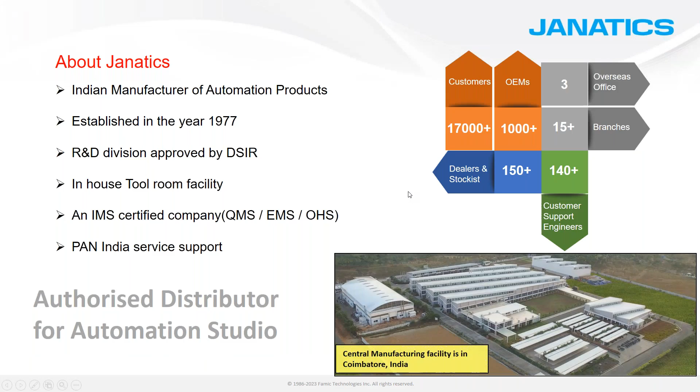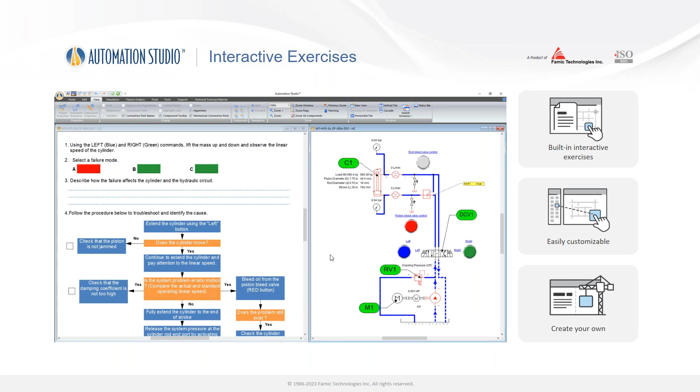Automation Studio helps you create a virtual twin of the hardware within the software, where students or teachers can change different properties and have a better understanding of the interaction between different components in the circuit. Later, they can use this experience to work on actual hardware, which could be more safe and reliable.

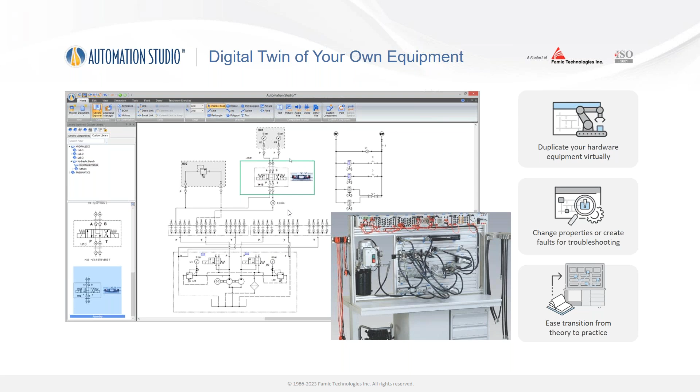We have illustrated libraries in the software. Illustrated libraries give more visual appearance of the component, how it looks in real life, for better understanding for students, where they can compare the ISO symbols and the actual 3D representation of the component.

The benefit here is that if you go for hardware alone, there are often limitations where only a limited number of students can be trained on particular hardware. But if you have hardware plus Automation Studio, students can have access to different circuits, better understand the interactions of the components and the impact of properties, and then later use it on the hardware.

It also enables students with circuit design software skills. Students gain idea about ISO symbols and it helps them develop blueprint reading skills.

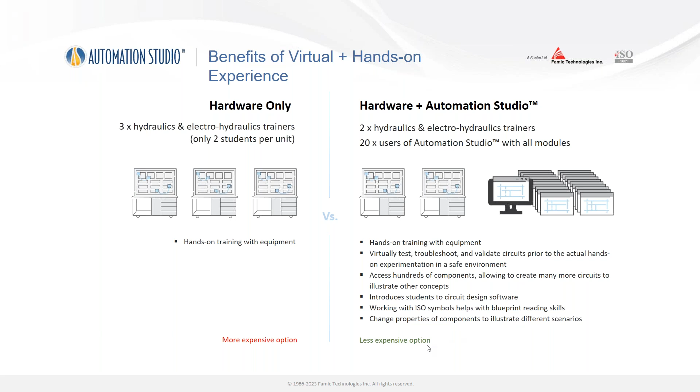In addition to these features, Automation Studio also offers a manufacturer's catalog. What are manufacturer's catalogs? They consist of pre-configured, ready-to-simulate components with exact manufacturer-specific data. All you need to do is configure the product from the catalog and drag and drop it into your schematic and use it in the system integration.

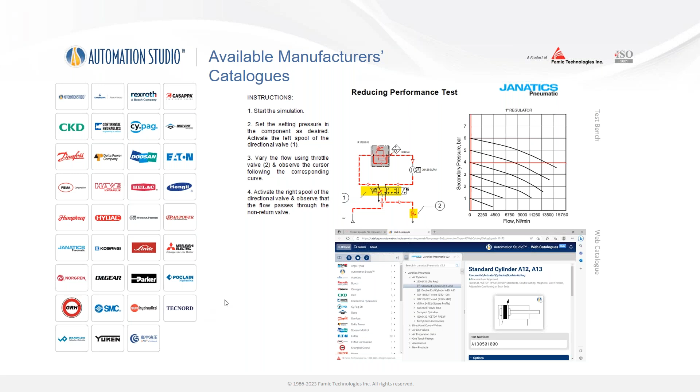We have manufacturer catalogs for different manufacturers like Emerson, Bosch Rexroth, Danfoss, Doosan, Eaton, Hengli, Janatics, Parker, Poclain, Sun Hydraulics, Yuken, and so on. These are a partial list of our industrial clients.

So this was the brief introduction about our company and what we do.

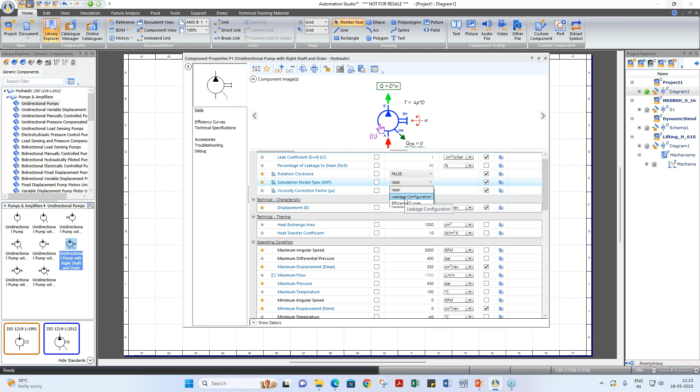But if you want a better real life scenario, you can go for a leakage configuration wherein you can introduce some losses or efficiency curves. Let me show you how it differs. When you select leakage configuration, you can see the image has changed, indicating the behavior.

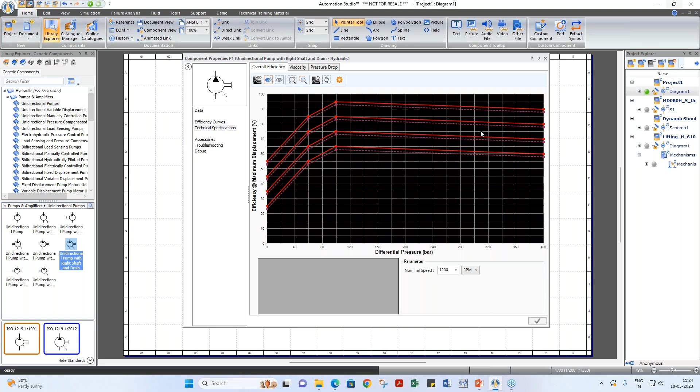Once this is activated from the simulation model type, you are able to enter the technical specification curves. In this technical specification curves, you can define the overall efficiency curve, which will in turn impact the losses. You can define the viscosity dependency curves and the pressure drop curve, which will indicate the losses with respect to the pressure.

Or if you have efficiency curves, which in most cases are provided by the manufacturer, you can see the image changed, and then in the efficiency curves you are able to enter the overall efficiency curve, volumetric efficiency curve, overall efficiency curve, and viscosity dependency.

This is a generic curve right now, but if you want to edit it and you have the data with you, just click on the curve and you can copy paste it over here. So if you have data in Excel, you can directly copy paste it over here. So you can have different configurations or simulation model types for the pumps.

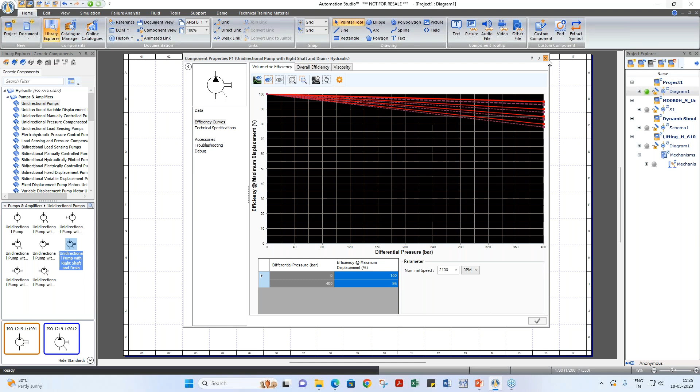Let me show you the different behavior through an already created file. So here on my screen, you are looking at different models. Let me just start the simulation.

So here we have a pump without shaft. When you click on it, you can define the displacement and the rated speed directly, which will influence the output flow. So here, as it is an idle pump, you can just see all the flow is going - 80 into 1200, which corresponds to 96 lpm - going back to the tank, with no losses.

Similarly, if you have a shaft, but again an idle pump, you can see again almost 96 lpm is going back to the tank. Here we have an idle scenario. The pump displacement is 100 cc.

The speed is 2000, so the output flow should be around 200 lpm, which is what I can see on the screen. All the flow is going back to the tank, so the output flow is going back to the tank. As it is idle mode, there are no losses. Same goes with the pump with drain, as it is in idle mode.

But suppose, as we discussed before about leakage configuration, if I configure the pump for leakage configuration, there are curves inside it which will influence the losses. So here you can see the output flow should again be near 200 lpm, but you can see there is a certain amount of losses, almost 7 lpm for 140 bar. So there is 7 lpm losses, which could be the internal leakages.

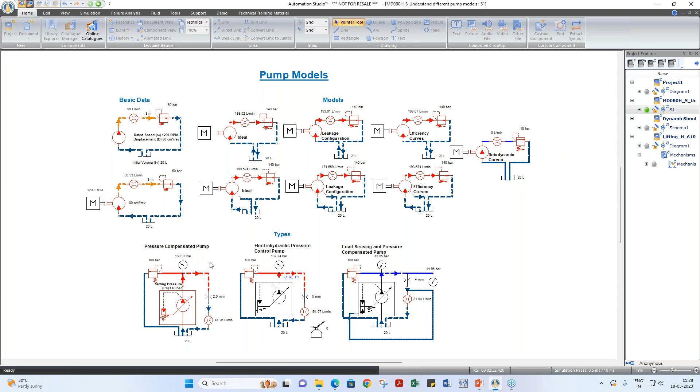In addition to this, we have a pressure compensated pump. Here, pressure compensated behavior means it should maintain constant pressure at the output of the pump, irrespective of the load. So even if I change it, you can see it is trying to maintain 140 bar.

We have an electro-hydraulic pressure control pump, so here you have an additional command. This pedal is linked to the solenoid of the electro-hydraulic pump, which can control the pressure at the output. So you can see when I'm changing the input, this control pressure is changing as per the input I'm giving through the pedal, decreasing the compensated pressure.

Similarly, we have a load sensing compensated pump. As we know, load sensing tries to maintain a constant pressure drop across the orifice. In addition to the displacement rated pressure and setting pressure, it has an additional property called differential pressure setting. Based on what setting I define, it will try to maintain that much pressure drop. Right now it is maintaining around 12 bar of pressure drop, and even if I change this orifice, it will still try to maintain this 12 bar pressure drop.

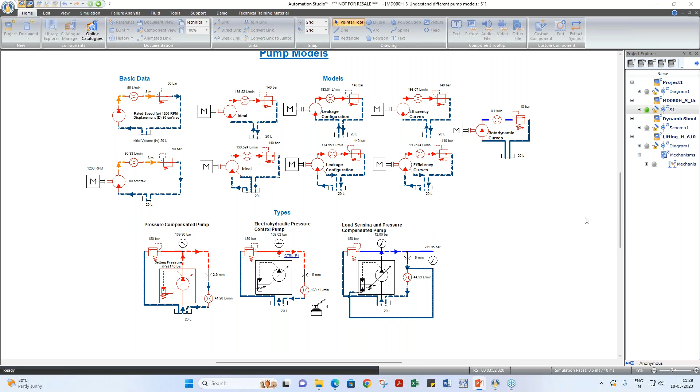So there are different models that we have in Automation Studio, and you can use them as per the requirement in your system. This was related to the pump. Now let us look into the proportional valves or direction control valves.

Let me create a very basic circuit to demonstrate that. I'll take some components from the library: a unidirectional pump, a reservoir, a 4x3 direction control valve, a relief valve, and maybe an actuator. For the actuator, I'm taking a double acting cylinder. So, basic components, I can zoom all the components.

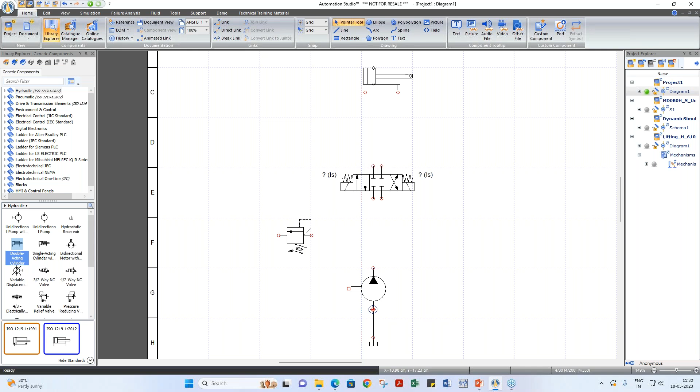When I take my cursor to the port, it changes into a target point. All I need to do is click on the port and connect it to the port of the component I want. So I will quickly make the connections. To make a junction on the line, you just double click. Relief output back to the tank, direction control output to the cylinder, and this port connected back to the tank.

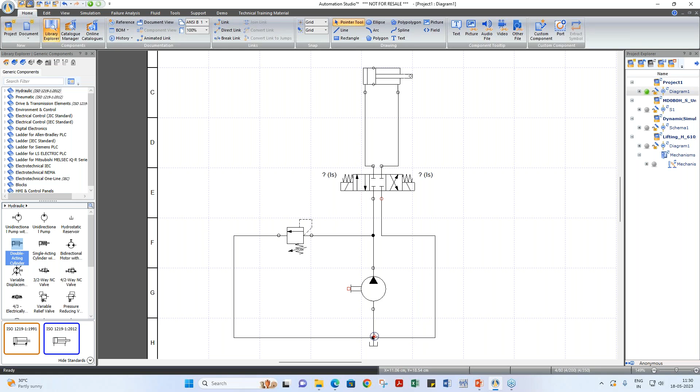So, a very simple hydraulic circuit I have created. I can simulate this; this is an on-off behavior. So when I select it, I need a drive to move this and run this pump, so I need some external drive. For the external drive, let me take an engine.

Okay, so you can see the cylinder is extending. I'm using an on-off behavior of the direction control valve. You can also have a proportional behavior.

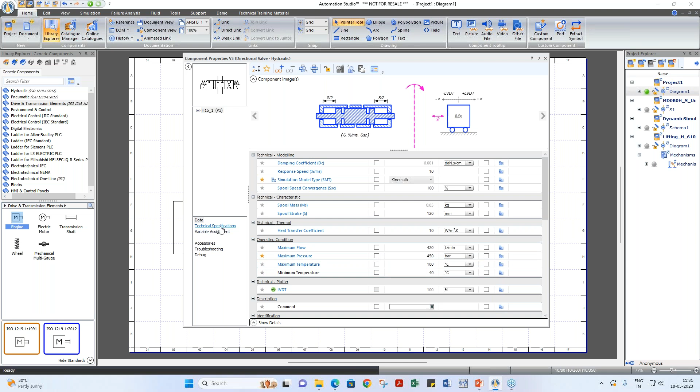I'll take a copy of this and change the on-off valve into a proportional valve or a servo control valve. When you double click on it, you see the properties associated with the direction control valve, where you can set the properties. In addition, we have a technical specification tab, which enables you to configure the direction control valve as per your requirement.

So I can change the behavior from on-off to proportional. You can see the additional lines indicating the proportional behavior of the valve have been added. You can define the number of ports, number of positions, initial position, neutral position, and so on.

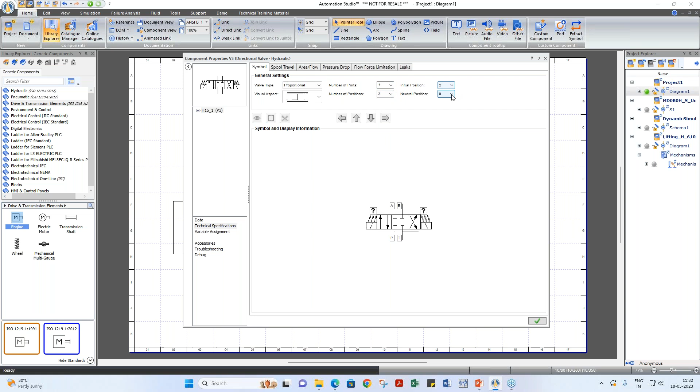You can define the spool travel curve. Based on the input signal, you can define what the spool travel would be. You can define what the flow would be at a particular position of the spool travel, that is configurable. You can define the pressure drop curve, flow force limitation curve, or define leakages between any port if you want to.

Okay, so this is, I have converted this into a proportional valve. Now I can control its proportional behavior.

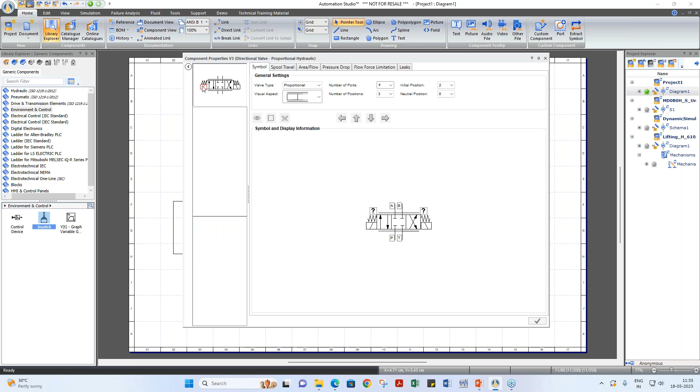To have proportional control, I will have an additional joystick which can link to the solenoid to proportionally control the position of this direction control valve. So I'll go into environment and control, select a joystick, drag and drop it, and double click on this to link this solenoid through variable assignment to the input signal of the proportional valve. You can see the description.

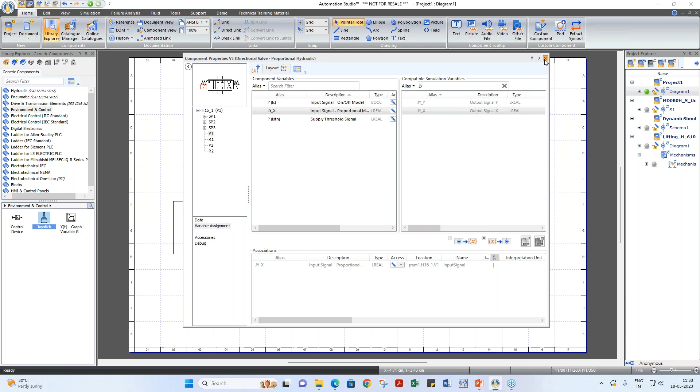This variable I'll be linking with the joystick variable, which defaults to JY. When I type JY, it filters out the variable, and I'll link it with JYX. Now you can see when I give input through this joystick, I can proportionally control the position of the direction control valve based on the input I'm giving through the joystick. In turn, this is controlling the flow going through the cylinder, which controls the speed of the cylinder.

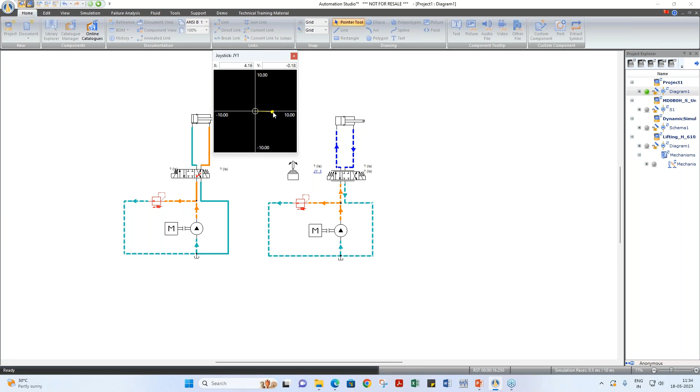So you can see, okay, in this way you can have a proportional behavior. You can convert the on-off direction control valve to a proportional valve, where based on the position or the spool travel, the resultant flow will be affected.

Now let us look into the load configuration onto the actuators. I'll just delete this and keep the original. Suppose I have a requirement wherein I want to have a constant load onto the cylinder, some loading conditions that I want to have onto the cylinder.

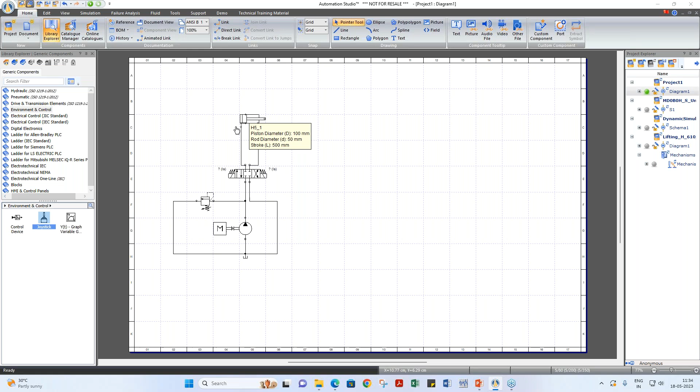You can double click on the component. When you double click on the cylinder, it shows all the properties associated with the cylinder. You can see the images indicating the different variables. Suppose I have an inclination of 45 degrees and there is an external load on the cylinder of 1000 kg acting on it.

Okay, so now this cylinder is subjected to some inclination and external load, which is a constant load. This should require additional pressure to extend this cylinder. So maybe I can just take a measuring pressure gauge and add it over.

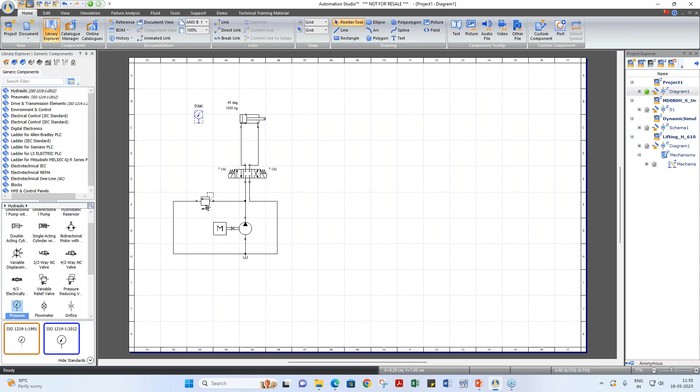Okay, let us try to simulate this. You can see some pressure is required because of this load onto the cylinder. During retraction, it is in the direction of gravitation, so it doesn't require high pressure, and there is some cavitation. But during extending, it is against gravitation, so to lift that load it requires some pressure.

Okay, so this is a constant load that I have defined. But what if I want a variable load acting onto the cylinder? For an instance, let me remove this cylinder and take a fresh cylinder from the library without any load. Now I want to subject this cylinder to a variable loading condition. To do that, I can double click again.

Here you have force curves. Once you click on the force curves, you can define the curve for driving force curve or resistive force curve. You can define a driving force curve for extension and retraction separately. And if you want a resistive force curve, for example suppose there is a spring that you want to compress, and the resulting force will change as per your cylinder position extends.

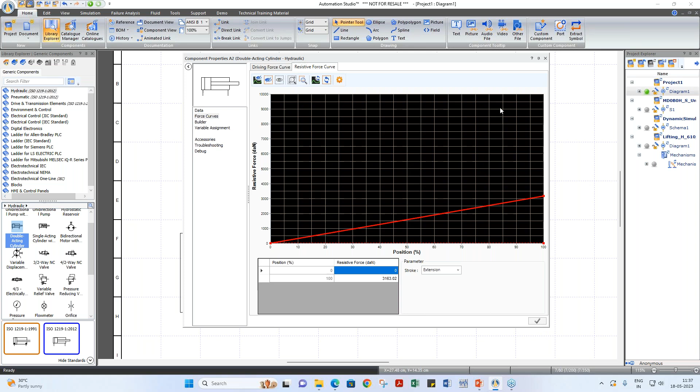Suppose during extension I want to define a linear increase in the forces. So here you can see I have defined some resistive force which is increasing in nature with the change in the position of the cylinder. So I have defined some curve over here, so this is a resistive force. Now when you simulate this, you can see this pressure value is changing based on the cylinder position.

During retraction, as I have not given any curve, it is just a constant value, but during extension you can see this is changing because of the nature of the curve that I have defined in the force curves. So this is another way that you can have this load configuration onto the actuator.

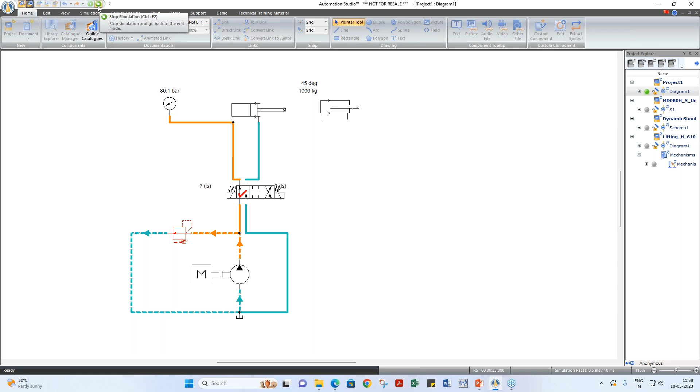Let me show you an example where you have a requirement to compress sand. This particular kind of resistance, because of compression of the sand, the resultant pressure onto the piston side can be calculated or seen. This behavior can be validated. I'll start the simulation and you can see this pressure changing, the higher pressure is needed to compress it further.

This particular behavior is because of the resistive force that I have created here. Inside the properties we have a resistive force curve, so you can see this resistive force curve. In this way, based on the application you're looking for, you can have force curves configured inside the actuators.

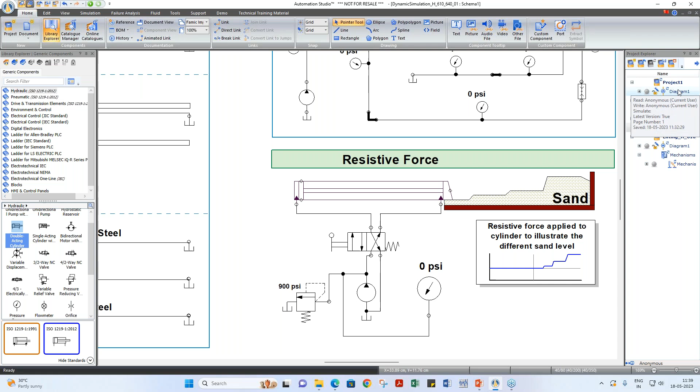Let me show you another scenario where instead of a cylinder as an actuator, I have a motor. I've removed the cylinder, I'll add a motor here, connect it, and make the connections. Now another way of adding load onto the actuator is through external command or a variable assignment.

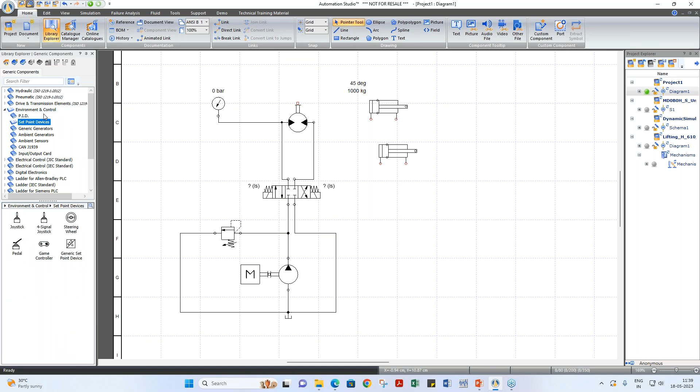For example, I want to have a resistive torque onto the motor through a pedal. I can go into environment and control and select a pedal. I'll link this pedal with the resistive torque of this motor. I'll double click on the motor, where you can define the driving torque or resistive torque, similar to what we have seen for the cylinders.

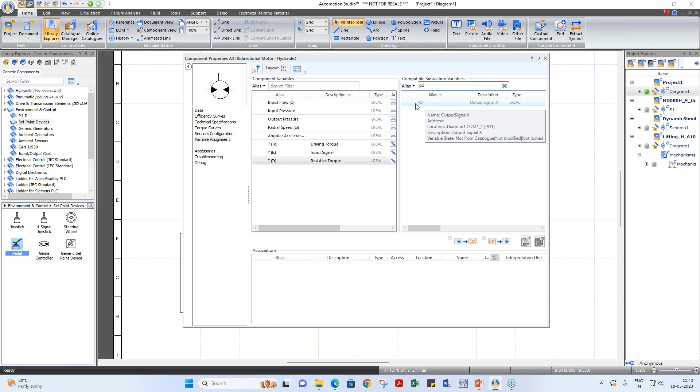Another way of adding the load is through variable assignment, where you have this resistive torque variable. This variable can be linked with the external command, which is the pedal in this case. The default variable for pedal is PD. I'll filter it out and link it. It will ask you in which unit you want to apply this resistive torque onto the motor. I'm okay with decanewton meter. I'll validate this and start the simulation.

When I increase this pedal input, you can see this pressure is increasing now. This is because I have added a resistive torque onto the motor, controlled through this pedal. Maybe this can be considered as a braking pedal, which is increasing the resistance to the motion of the motor, acting as a resistive torque. So this is another way how you can have a load configuration in Automation Studio.

Let me show you one more way where you can have the load impact onto the schematic through mechanism manager. Here on my screen is the mechanism that we have created using the mechanism manager tool in the software. For every body we have created, we defined the joints or the motion constraint between them.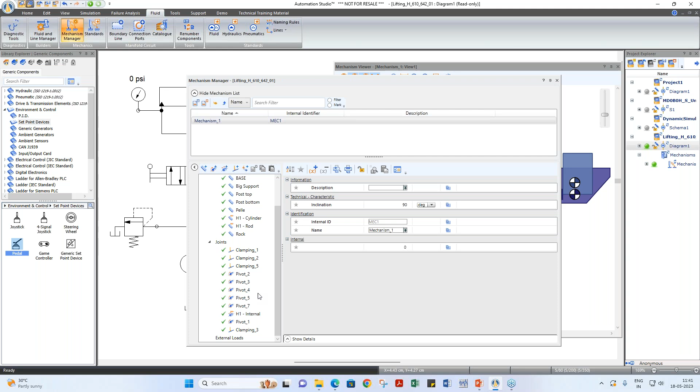So this is a rock body, and you can define the body mass of this rock body. These properties can be defined, and based on the linkages and the motion constraint type of joints between them, this motion will be impacting the hydraulic circuit.

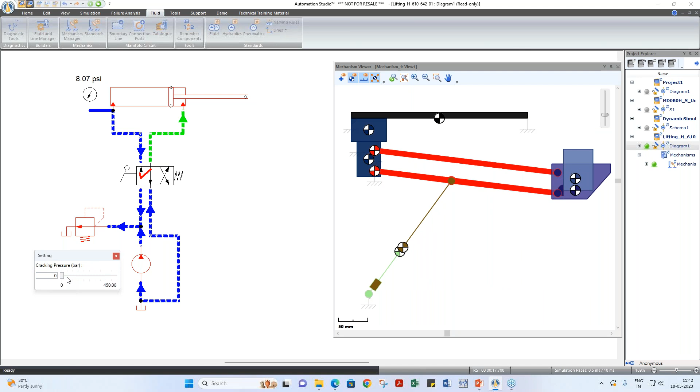Let us try it. Let me try to lift it. You can see this pressure is increasing as it is lifting higher and higher. Suppose I don't have enough pressure through this relief valve in the system, so this shall fall down. Let me decrease this pressure, so you see this fall down because of the weight in the bucket.

The rock weight is 100 kg, and with this pressure I don't have enough to lift this load, so I need to increase the pressure. When I increase it, you can see this is extending up. So another simpler way of having the load configuration is through a mechanism manager. You can create a mechanism and have its impact onto the hydraulic circuit.

Now we will look into another topic: mobile hydraulics related components. Specifically, we will look into some functions of pumps that we have. You might have heard about load sensing or pressure compensated behavior, axial piston pump or radial piston pump, swash plate pump. In Automation Studio, you can also configure such kinds of pumps. Let me quickly show you how.

In the pumps and amplifiers category itself, you also have swash plate pumps. Let me create a very simple arrangement for load sensing and pressure compensated pump. This is a different kind of symbol compared to the gear pump. Inside it you can define the efficiency curves, and in addition you can also define the swash plate or swash plate cylinder parameters, the spring constraints, the force constraints.

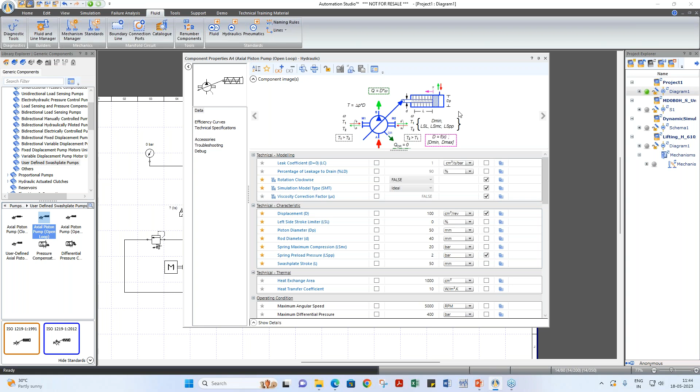Let me quickly create a circuit for load sensing pressure compensation. Here we have some hard-coded pressure compensator and differential compensator. Let us try to use this to create the function.

I'm dragging and dropping it. You can change the orientation using shortcut keys. I'll just drop it down. I'll take a relief valve again for the load, and to control the flow I'll take an orifice.

I'll just make the connections quickly. I'll need a reservoir, so I can just copy the reservoir from the circuit. Load output going to the tank.

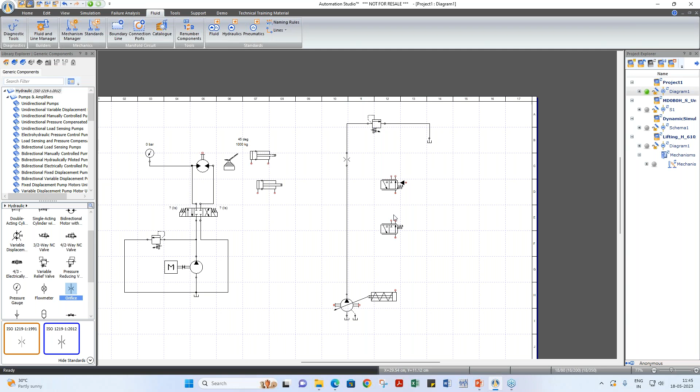Now I have this valve. This valve will control the flow going through the swash plate, so I'll connect this to the swash plate port, and this port will be going back to the tank. Now this port needs to read the pressure, or sense the output pressure of the pump, so I am connecting it to the same line as the output of the pump. This pilot is to sense the differential across the orifice.

So this will be our load sensing differential pressure control valve, and this is the pressure compensator valve. You can change the function of the line by right-clicking and changing it to, say, load sense line. You can see the appearance has changed. Now to drive this, I'll just take the engine.

Now the valves here are also configurable. Based upon what path, what pressure drop you need, you can define the CV or KV value for each path - you have A, B, C paths. So I can just change the KV or CV values, and you can see the pressure drop curve has changed. This is entirely based on what behavior you require for the system, or what manufacturer specific behavior you're looking for.

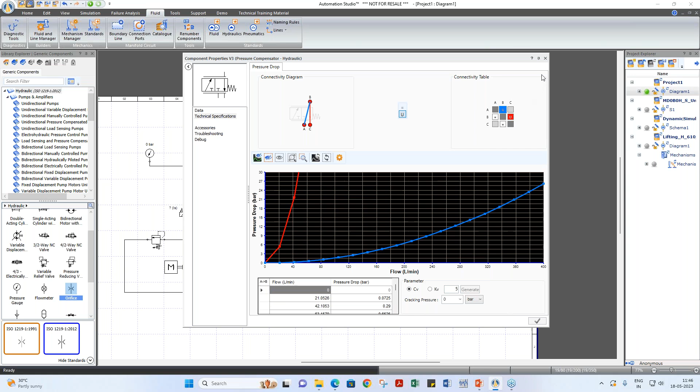Now let us see whether this works as we expect for a load sensing pressure compensated pump. I'll just start the simulation. Again, there are some tools in the simulation tab which allow you to measure different properties during simulation. I'll want to see the differential pressure across this orifice.

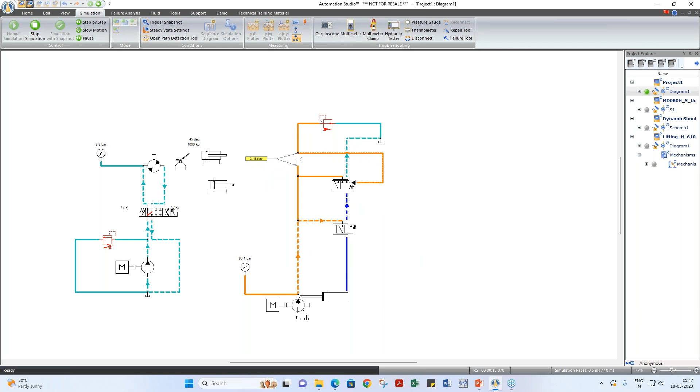Now let me check the values of these valves. When you click on this, it is 80 bar. Maybe this is the pressure compensator pressure setting, so maybe I want it set around 250 bar. You can see your pump has started to stroke again.

Here's the orifice - maybe let me open it fully for now. You can see the pump has started giving all the flow to the load. You can see the load sense setting. Say I want to control 20 bar across this orifice.

Now to activate this load sense valve, maybe I need to create some restriction. So I'll decrease this orifice so that this pressure drop increases. Let me zoom out more for you.

I'm decreasing the internal diameter, which is in turn increasing the pressure drop across the orifice. Now, as I have this load sense valve here, even if I further decrease this, you see it is still trying to maintain that constant 20 bar across the orifice. This is because of this load sense behavior.

Now I can also check the flow going through this. I can use the dynamic measuring instrument and measure the flow.

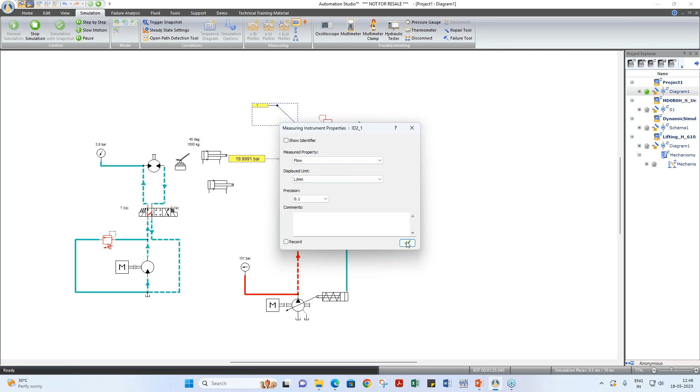Okay, so even now if I change the load, you will find that it is trying to maintain the pressure drop and the resultant flow is still constant. So this is the load sense behavior that you expect from a load sense pressure compensated pump, and this load sense behavior will be true until I reach the maximum pressure setting, which is 250 bar in this case.

So once I go to 250 bar, this valve activates and your pump starts to destroke. You see the pump starts to decrease, destroke, and you can see that it does not allow the pressure to go beyond 250 bar, which is pressure compensated behavior.

Now this we took the generic components from the library and tried to create the behavior, but we have manufacturer's catalog, and we can look to the another topic that we had for today's webinar, like how you can optimize the circuit design through use of this manufacturer's catalog.

Now let me just simply show you an example of a similar kind of pump, but which will be a manufacturer specific symbol and behavior. So for accessing manufacturer's catalog, you can simply go in home tab, open catalog manager. Here if you have the catalog downloaded, you can directly open it, and this is how it will look into the catalog manager interface.

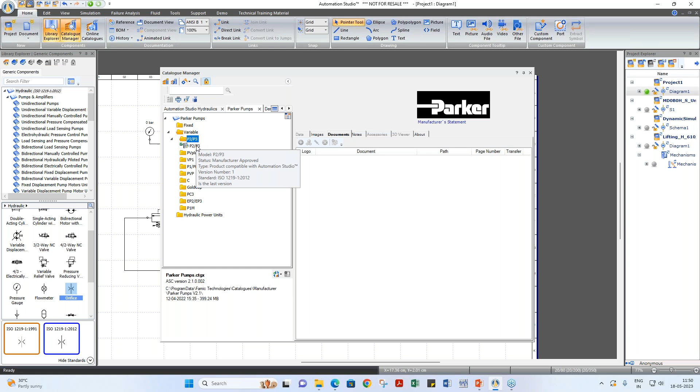So let me show you a similar kind of form where we have a similar arrangement or the similar kind of functions. So this is a P2 P3 pump, a Parker specific pump. When you click on this, you can see this manufacturer specific symbol.

Okay, you can configure this based on the requirement. So as we know, every component, manufacturer specific component, comes with a part number. So based upon your requirement, you can configure it through the configurator. This configurator is designed based on the manufacturer specification. I'll just quickly make the selection.

And you can just select it from the drop down. Maybe this is torque control, load sensing with bleed off, and pressure control. So all three functions we'll be looking at in this. So I'll just quickly finish it out.

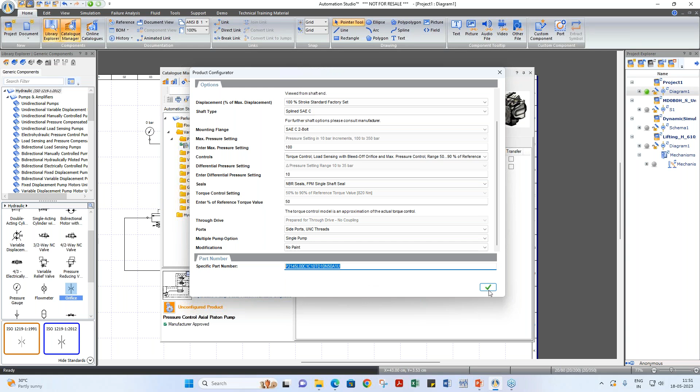Connection. So here you can see the exact part number now for this particular manufacturer specific pump. All you need to do is drag and drop it onto the schematic.

Now you can see, let me just show you. Yeah, you can see the manufacturer specific symbol. All these parameters inside the valves and the efficiency curves are already configured inside this, so you need not worry about the behavior. You can also test and validate its behavior through the test bench.

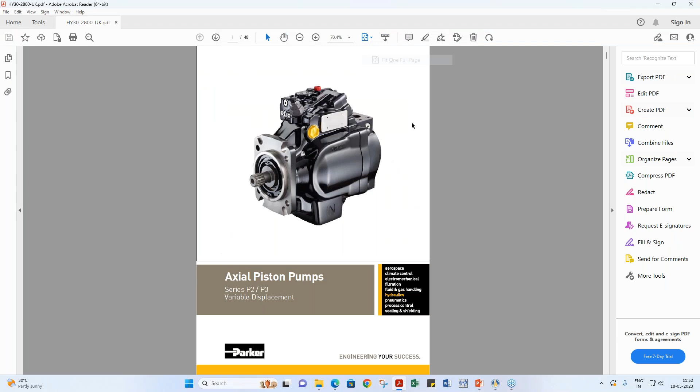So in the section over here, you can see the data associated to the component, the image associated to the product, and in the documents tab, once you click on this link, it will take you through the specification, manufacturer specification, which will give you details about the component, its behavior. You can check it, verify it over here also. And with every such product, you will have a test bench where you can test the behavior of the component.

So I'm just opening this test bench to show you how you can test the product. So here on my screen, you're looking at P2P3, which is a pressure compensated load sensing torque control pump. In the shaded region, it's the manufacturer specific symbol.

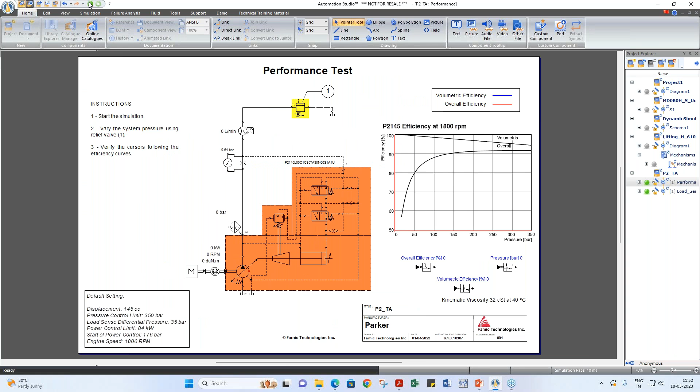This is the efficiency curve associated to the product. So you can just simply follow the instructions, test its behavior. Now you can see the default setting is 145 cc, 350 is the pressure control limit, 35 bar is the load sense pressure, and the power control limit is 84 kilowatt.

Now let us try to simulate it, see if it behaves as expected. So I can change this pressure. You can see the efficiency curve is followed. This is followed because we have configured the curves inside the pump, and this will be true until I enter the power control range, which is 84 kilowatt.

So you observe this is at 72 right now, but when I go beyond 84, the pump is trying to destroke, and this will not go beyond 84 kilowatt, which is the torque control or power control feature in swashplate pumps.

So this is a safety feature for your engine. So this is decreasing right now. You can see it is not allowing it to go beyond 84 kilowatt, and your pump is destroking.

You can see over here, and this will be true until I reach the pressure compensated value, which is 350 bar over here. You can also check it from here. So 350 bar. Once I go beyond 350 bar,

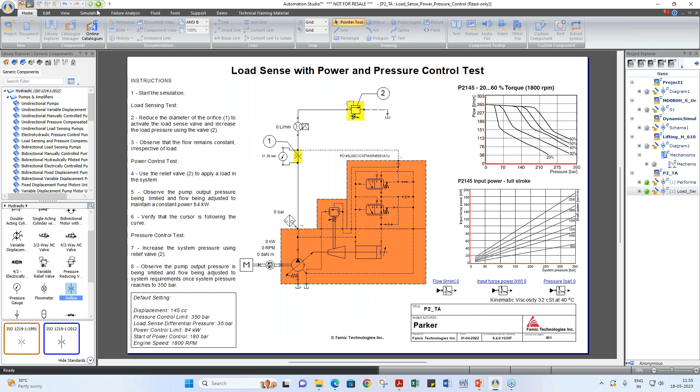So in this way, you can have optimization of your circuit design through the use of manufacturer specific components, which saves a lot of time and effort, if you try to create it from the generic component from the library.

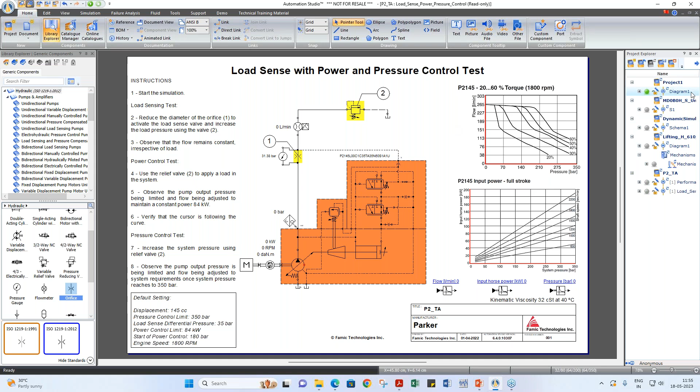Let me show you another example. Let us see an example where I suppose I want to create a hydrostatic system. So maybe I can use some components from other library. These were Parker pumps. Let me take a component from Poclain pump, maybe a hydrostatic pump this time.

So this PM series is again a manufacturer specific series, PMV0. I'll go and select it over here. You can configure based on your requirement, just configure it quickly.

So this way is similar. You just configure it based on your requirement. So just quickly, I'm selecting the options. Exact part number you can see right now. You just validate it. All you need to do is drag and drop it onto your schematic.

So again, you can see how quickly I have used a manufacturer specific product with exact symbol and the behavior. I just configured it and drag and drop it.

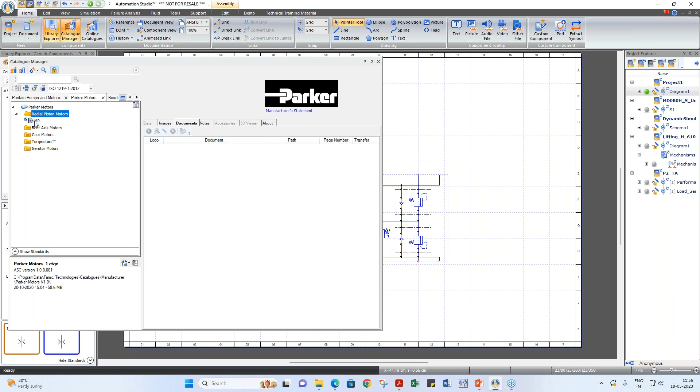Maybe I'll take say a Parker motor, where this hydrostatic drive is rotating a motor, which is Parker MR series. I can configure it, just quickly configure it and drag and drop it over here.

Okay, so I can complete this hydrostatic system through this. I can just rotate the orientation. This output is going to the motor and back to the tank. I can have these measuring instruments at the measuring ports over here.

Okay, and to drive this, I'll take this engine. So simply I've created this, and suppose I want to have a load on this motor rotating, say, a wheel. Let me add the orifice reservoirs first.

So maybe I want to add a load onto this motor. I can just go into drive and transmission. Maybe I can have a mechanical gauge as a measuring instrument and add a wheel onto this mechanical gauge.

Okay, so simply I can just have a pedal now to have a load onto this. So to apply the load, let me just simulate this. When I enable this displacement, I'm controlling the displacement on the pump.

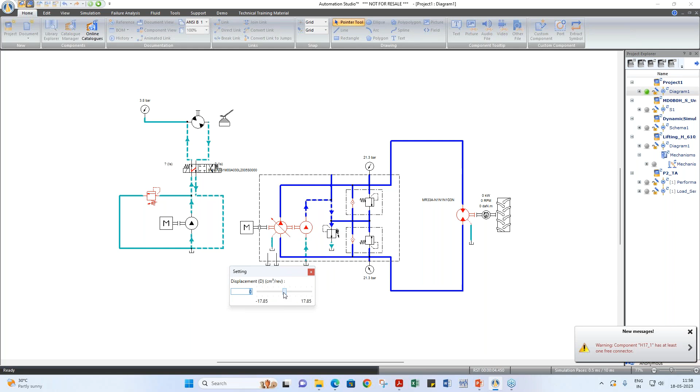So you can see I have the hydrostatic system. This is the PMV0 Poclain specific hydrostatic pump, and then we have the Parker motor with specific behavior. So this really helps you to optimize your circuit design phase, to see how the manufacturer component works, how the symbol looks like, a better understanding of the industrial blueprint circuits with ISO symbols and all.

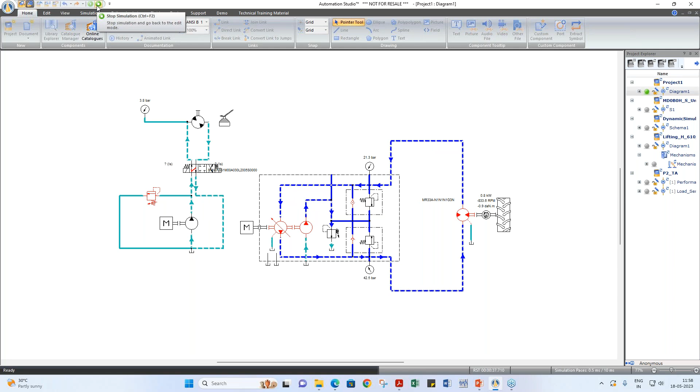Okay, so just to confirm, you can see when I double click on this, I go into the efficiency curve, you can see a specific behavior of the efficiency curve. This will all influence the output result of your simulation.

Okay, so this is how you can optimize the system design phase through the use of manufacturer's catalog. Another topic that we have for today's webinar is related to the manifold, how you can create a 3D manifold.

Let me use again the same circuit over here. Suppose I want to create a 3D manifold across this port. So let me just arrange the circuit.

Okay, so for that we have some manifold tools. In the fluid tab we have these manifold circuit tools where you can create this boundary line across the components for which you want to create a manifold. Suppose I want to create a manifold across this port, this part of the circuit.

Now we have manifold compatible catalogs where you can use the components from the catalog directly into the schematic. Say suppose I want to replace these two components with a manufacturer specific component, again I can show you use of manufacturer's catalog. So in the home tab in the catalog manager, maybe now I will use another catalog.

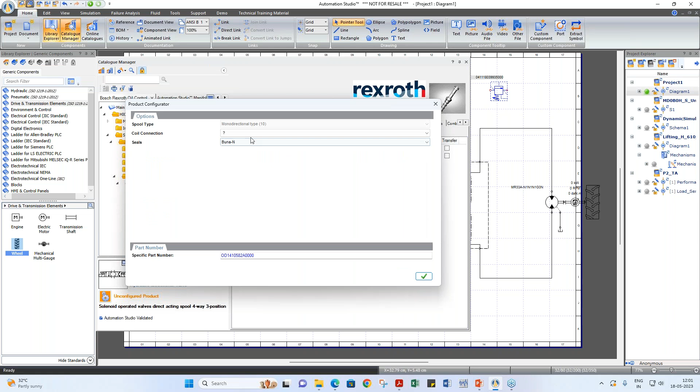I'll take a 4x3 position, size 8, VDS series. Again, I can configure this. Exact part number is seen, and I'll just drag and drop it. Now I will use this manufacturer specific components over here. These components are manifold compatible.

You can change the rotation using shortcut keys like Control R. So I've rotated it by 180 degrees and placed it over here. Now I've used the manufacturer specific component. I need to create a manifold block across these components and these lines.

So once I'm done with this, all you need to do is right click on this and create manifold circuit, default connection ports. This will create the ports at the intersections of the lines. So you can see the ports have been added. Once we are happy with this, select all the components,

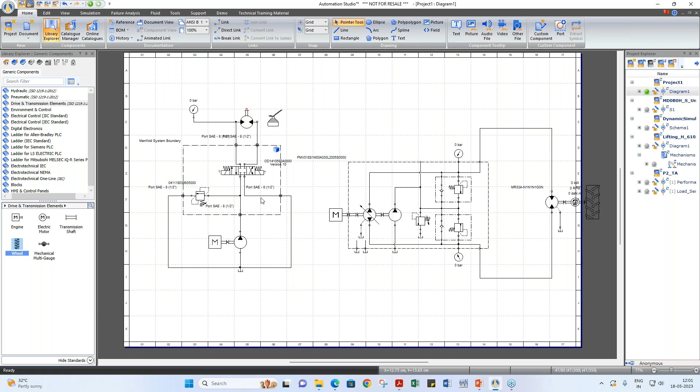right click and say generate manifold. So I have created a manifold circuit. Now to enter the manifold AS Live Manifold interface, you just double click on this icon.

It will ask you in which unit you want to create this manifold. So you can either go for imperial or metric and just validate this. Now this is opening on my other screen. Let me take it to the main screen.

So here, this is how it looks like, the AS Live Manifold interface. Now you can manually create it, or we have the auto create function. This will auto create the manifold based on the preferences that you have entered. So you can set the preferences in the current options.

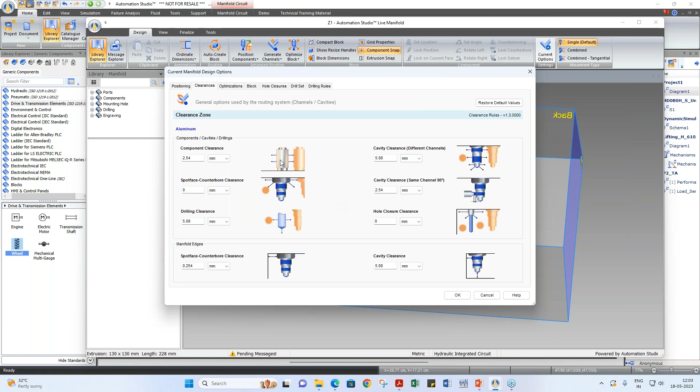So here you can see different preferences that you can set. You can define the values of the clearances that you want for the manifold. Some standards that you can define. You can define the optimization standards, the block interface, hole closures, drilling sets, drilling rules, and all that.

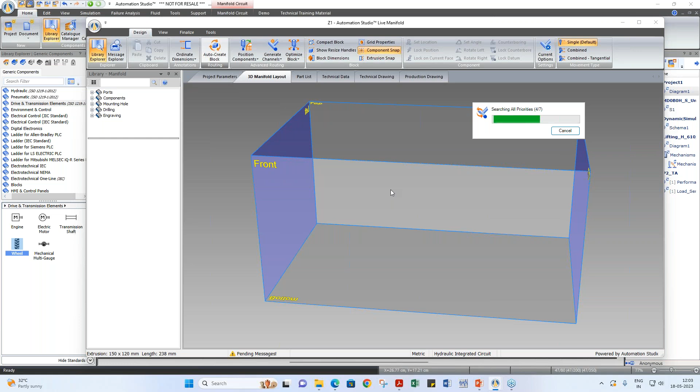So based on these options or the preferences that you set, if you go for auto create block, it will take into consideration all the preferences and go through an algorithm and create possible routing solutions for you.

So here on my screen, it is trying to fetch different solutions based on the preferences. You can see there are 100 potential solutions, and whichever solution is okay for you, you can go for it. So right now I'm just opening one of the solutions that you see on my screen.

I have, this is the manifold that is created, and this is so easy and user friendly to create this manifold. Now this manifold is not just the 3D manifold, you can also simulate this.

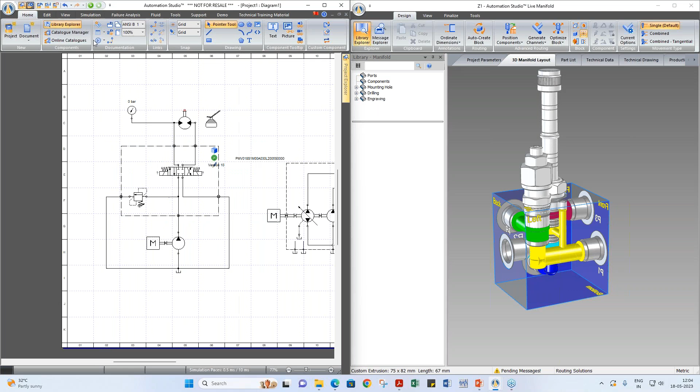So on my screen, as you can see, on the right hand side I have the manifold, and this is the hydraulic circuit. So I can start the simulation. You can see the animation happening on both the screens.

Now this is a manifold, so the routings or the drilling parameters will impact the pressure drop. So whenever you hover your mouse, you can see the flow, pressure, temperature. You can see it in each line.

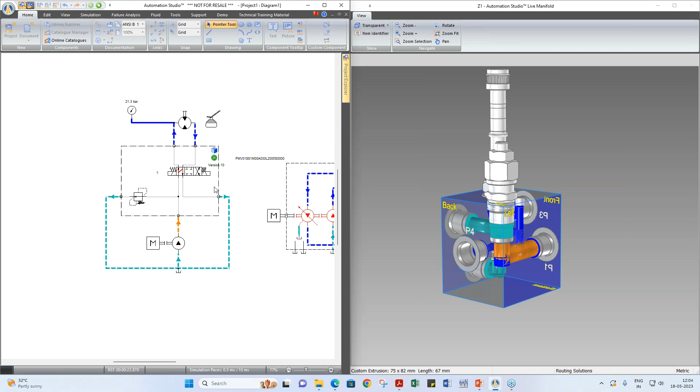So when I change this position, you can see the flow, the pressure. So you can measure this, you can see it, analyze it. So if you change any conditions onto the system, it will show you the impact in the manifold too.

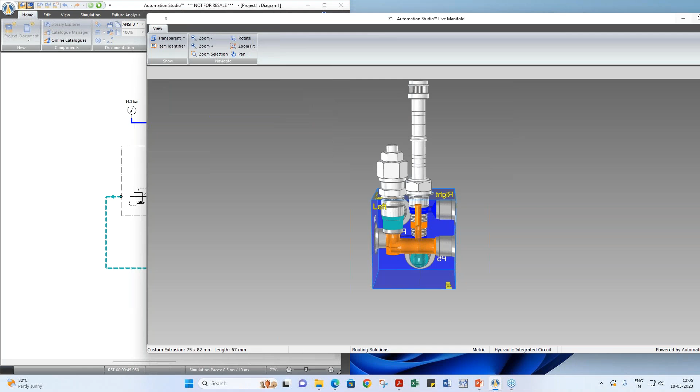Okay, so this is manifold creation, and let me stop this simulation and show you some additional features that we have with manifold. So in addition to this, you can create the part list.

You can see the technical data. You can create some technical drawings. So if you want to create a technical drawing, it can create the technical drawing for you.

Just a second. Okay, so here you have the technical drawings over here. It's the same, you can use the auto create function if you want to. It will auto create the technical drawing. So it is trying to, in just a few seconds, it will create the views.

Okay, you can see the technical drawing already created based on the manifold that you have created, and you can also create a production drawing if you want to give it onto the shop floor. It can create and give you the production drawing also. So it helps you

in optimizing the manifold block generation phase, and helps you also analyze it better through simulation.

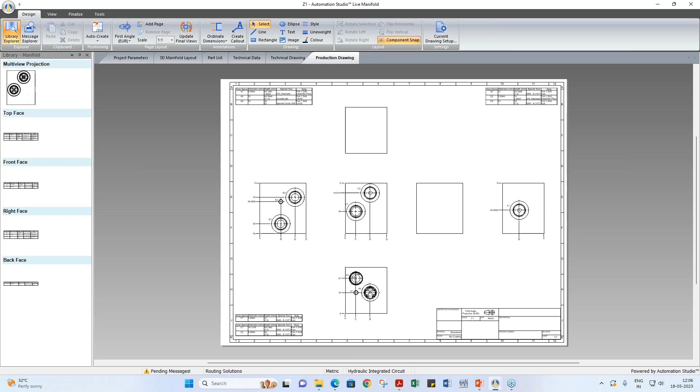Okay, now this was regarding the topics that we had for today's session. Now to show you the capabilities of the software, let me show you a few demo files just to show you how you can create industrial circuits or complex circuits. Maybe I'll just show you through a demo file.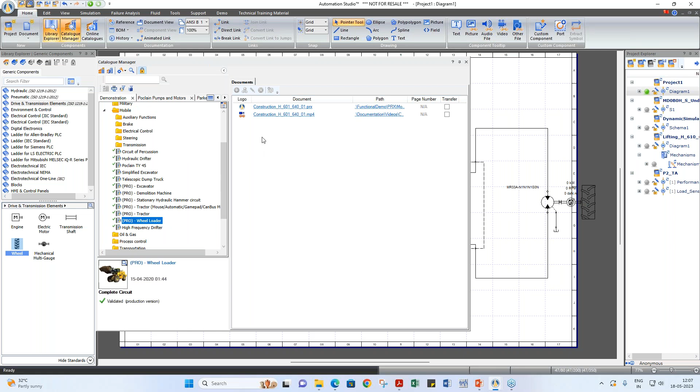I'll show you a mobile hydraulics wheel loader example. Let me just open this file.

Here we have an example where we have created a tractor or wheel loader system. This is a complete wheel loader application with different components: closed loop pumps, open loop pumps, steering unit, braking units, priority valves, load sensing pump, and control blocks. All these components are manufacturer specific, like this Sauer-Danfoss closed loop pump, a Linde pump, a Sauer-Danfoss steering unit, Vapco valves, Safim priority valves, Bosch control blocks, and Bosch pump.

I'll try to simulate it. You can control the inputs through the joystick, through the commands that you have, like controlling the current, which in turn will rotate the wheel. You can see the flow going through the wheel. Similarly, I can do it for the other hydrostatic pump, and you can see it rotating the wheel now.

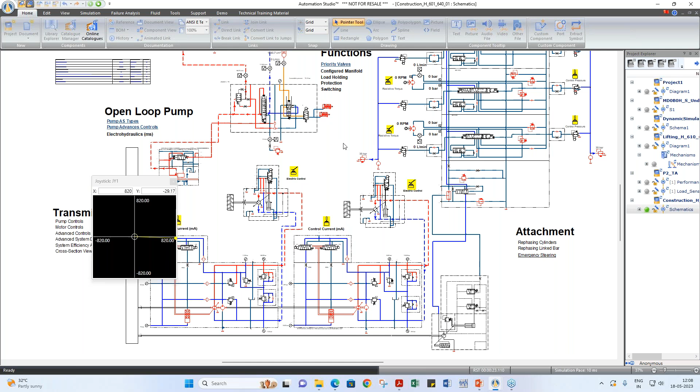Similarly, you can have this steering unit. You can change the steering unit and see the steering happening. You have the brake pedal over here, and you can apply the brake through this pedal. You can see the change in force, the brake being applied, and the cylinder changing its position.

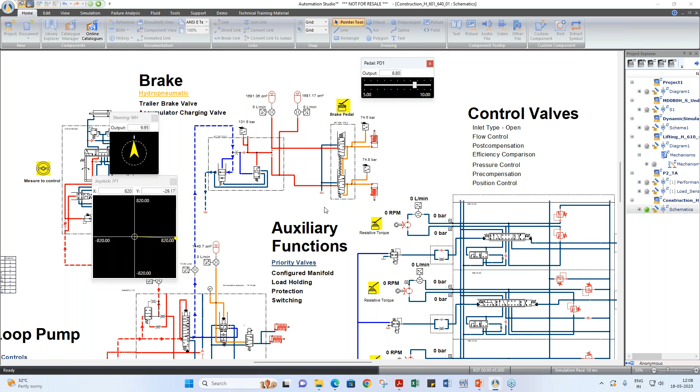Similarly, you have a control block, and this load sensing pump is providing flow to this control block. I can change the current, which impacts the pilot over here on this valve, and the flow goes through the load, which is the motor. Now this motor is running at nearby 1950 rpm. I can apply load onto this, so you can see the pressure increasing. Once I go beyond around 250 bar, you see the motor stop. No flow is going through the motor because you have the safety relief valve in this control block, which is not allowing the pressure to go beyond 250 bar.

So in this way, you can have a complete system created in Automation Studio, and such complex systems can be created. If you have such system integration to be done, manufacturer specific components can really help you optimize your design phase. Let me show you another example of an excavator.

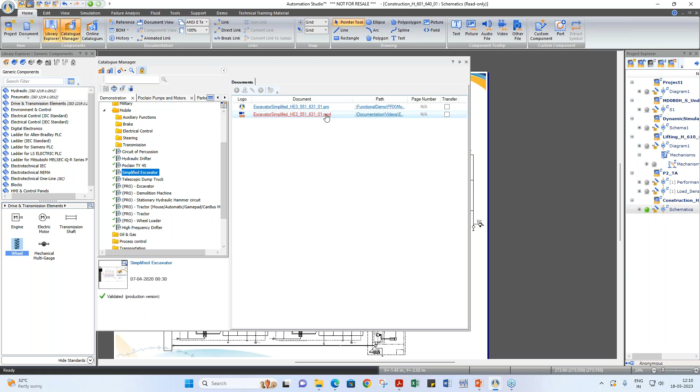I'll show you through a video, as we are limited on time. So this is on my screen. You're looking at the excavator system, where you also have a 3D model linked to the hydraulics cylinder. So the motion that you see is based on the motion that you have in the hydraulics.

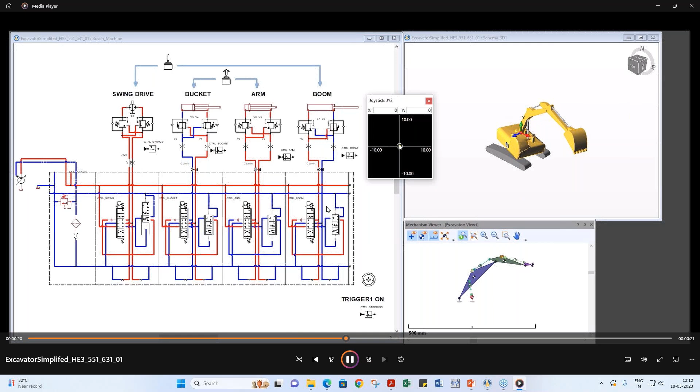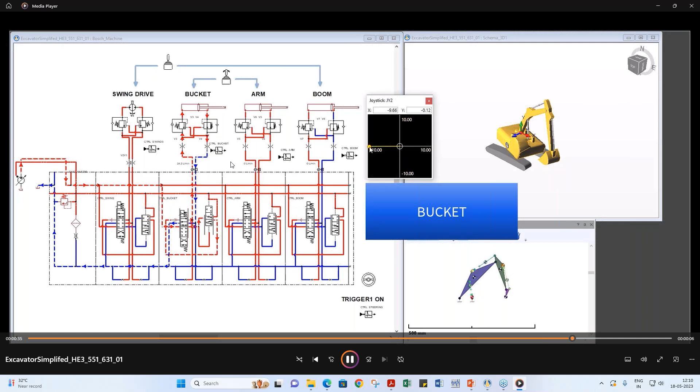The loading condition or the mechanism will also impact the behavior of your hydraulic circuit. So if there is a change in the load or the body masses, it will have an impact on the hydraulics circuit. This is what we have already seen earlier in the webinar, where we saw load configuration through the mechanism manager. Such application circuits can be created in Automation Studio.

This was all regarding the topics that we had for today's webinar. Just to summarize.

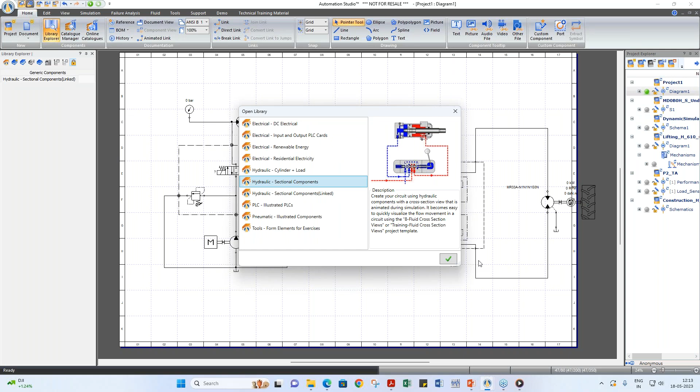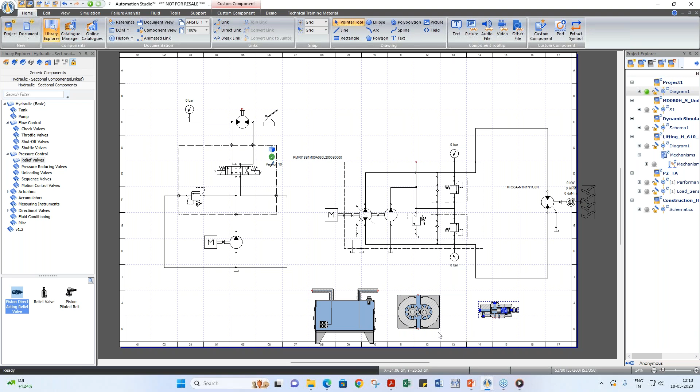Maybe I'll use another one. Okay, so here you can have cross sections of different views, say for a pump, but this is limited animation that you can see on my screen right now. The animations can be created in the software itself. For example, with a relief valve, the CAD will animate based on the connections that you have. So for some components we do have it, but this can also be created later on.

Let me see if I can look out for an example for you.

So you can see on my screen. So this is done using the Illustrated library.

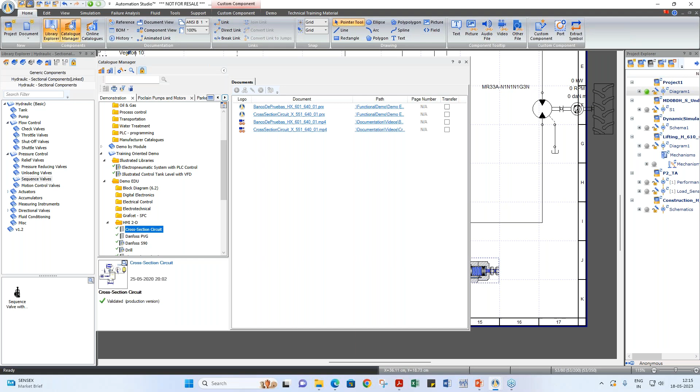Okay. Yeah, so any other question? Yes, another question from Prakash: can we measure the linear velocity of the wheel attached to the motor? A linear velocity - I doubt this can be done, but if he can elaborate more on his question, what exactly as a parameter we are looking for.

Shushan, can we unmute him? Yes. Hello, Prakash, thank you, team. Can you hear me? Yes, Prakash, yes, we can.

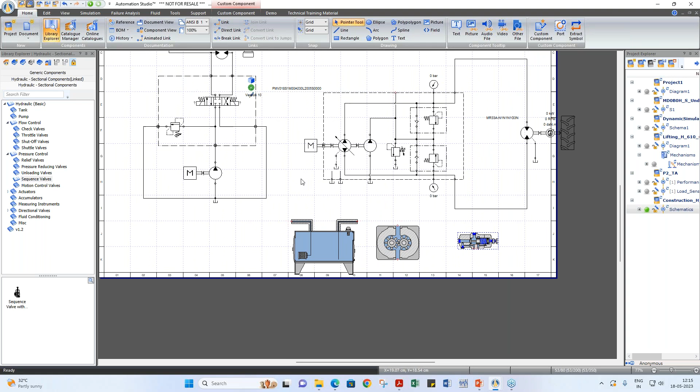So Vijay, I want to measure the linear velocity of the wheel attached to the motor directly. I want to get the real-time values of the wheel for the linear velocity. So do we have any option to check that in Automation Studio?

Maybe we can use some calculation to do it through the controller. I'm not very sure which parameters will be helpful for this, but in terms of measuring the values, we can measure some values related to the pump through dynamic measuring instruments. And if those values can be used in the controller through some calculation to calculate the velocity, I guess that is one way that I can think of right now.

But maybe I can check on a better solution for this later on, and we can get back to you. Yeah, that should be fine, I will get in touch.

And the second query I have, Vijay, is regarding the time needed for the cylinder in real time. Can we measure the time for extending the cylinder from the piston side to the rod side completely?

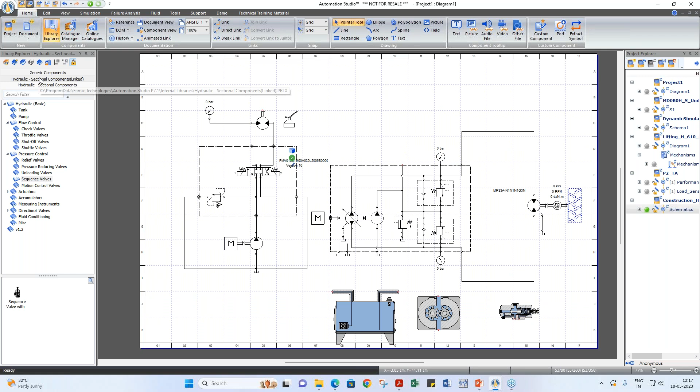Yes, again, that can be easily done through the controller. So we can measure, say for a cylinder - say I have a cylinder, I can measure the speed of the cylinder, right? Correct. So I know the stroke, I can measure the velocity or the speed of this cylinder easily. I can just calculate the time through the formula, distance upon speed.

Yeah, so this can be easily done through the controller. It may not be directly in respect to time, but maybe the plotter can help you with this - if you drag and drop. I tried with the plotter, but I was not getting the real-time values I was looking for. Okay, I will check with the controller maybe.

Yes, and also if you have a specific requirement, you can let us know. We can work on that to definitely provide the solution you're looking for. Yep, yep, thank you, Vijay.

We have another question from Patrick - can AS be used to remotely control a hydraulic system in the university's lab from home? From home, okay, yes it can. So maybe she's looking for the OPC connectivity kind of thing. So yes, we have features for...